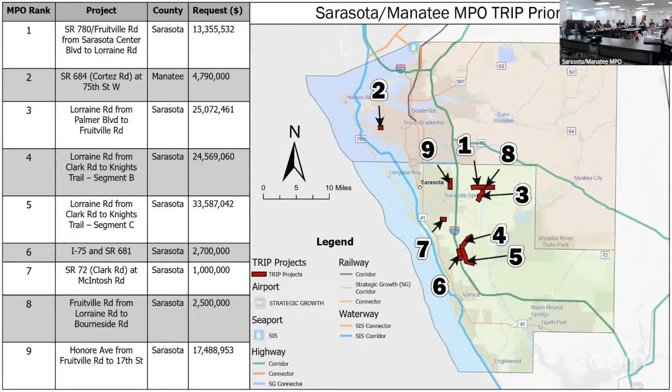All right. See any questions? So I will now entertain a motion to recommend MPO board approval of the 2026 joint TRIP project priority list. Is there a motion? So move. Second? Second. All right. I didn't catch who said it first. I don't know. Okay, my motion. Okay. All right, so we have a motion with a second. All in favor, say aye. Aye. Aye. Any opposed? Hearing none, motion passes unanimously. Thank you.

And Nina is still up. All right, the last action item today is 5D, advancing organizational safety culture. Thank you. So December last year, we kicked off a new safety initiative called Advancing Organizational Safety Culture. You may have heard us talk about it at the previous meetings, and so what we want to do at this meeting is offer a more detailed view about what this initiative is all about. We are taking it to the MPO board for approval on Monday.

Advancing Organizational Safety Culture is really rooted in the Destination Zero Safety Action Plan. Since the safety action plan was adopted, we worked on the education implementation plan, developed a high injury network. We had a pilot with Federal Highway Administration on their organizational safety culture self-assessment pilot, which helped develop this tool that FHWA was publishing and has since been published. And this is really where the MPO invited stakeholders like you to participate in that workshop. I think several of you were actually there. And it was really the first time that we were sensitized to this idea of organizational safety culture.

So we didn't do much changing of the objectives or the strategies or the action items because we kind of confirmed. We started with a clean slate every meeting. And when we got after it, we looked at it, well, thank God, that's like a 95% match of what we already had. So again, strengthening partner engagement, working with groups like this to help implement that culture and everything that's in their plan, it's perfect for this. And we did this with in mind that this isn't just a District 1 document. Every organization and partner in the district can use this as a guide to help you with your own approach. And so this MPO is actually steps ahead of most of the others in the district.

And then finally, reinforcing safety successes. This is the one area where it is kind of leaning in on projects, where if we've done some safety treatments on a roadway and we see that it's working, then can we do that in other locations? You know, repeat that success in other places. And I give you two examples up here.

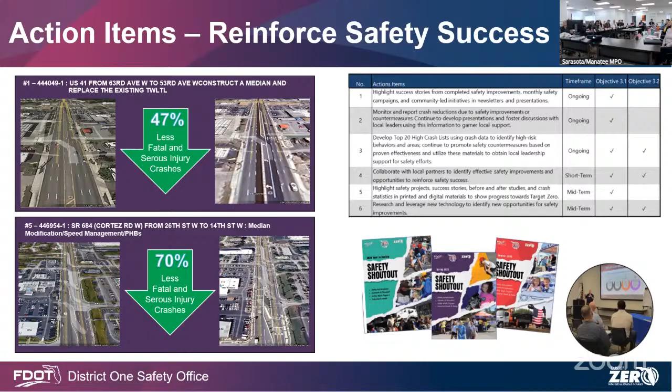On the left, this was a 41 corridor here in Bradenton area, and Cortez Road also in Bradenton area. Some of the modifications and treatments that we did out there have brought 47 and 70% less fatal and serious injury crashes in those corridors. And these are among our top 10 worst fatal and serious injury corridors in the district. So if we can do this here, we can do it elsewhere. And so that's what we mean by repeating and reinforcing safety successes.

This is a look at all of the emphasis areas that you see in the state's strategic plan and how we compare in district. Red are fatalities, blue are serious injuries across the district in each of these emphasis areas. So obviously lane departures is by far the highest, followed very closely by intersections. And then down about a third of the way down, you got aging road users. Anybody have any idea why aging road users numbers would be so high?

Retirement community. Retirement community is one, but what else? I asked the people that are in my age bracket in the room. We get injured a lot easier. Now you can hurt yourself going out the door in the morning, okay, sometimes. So we saw, especially in some of our counties where there are a lot of retirement communities, why in the world are your numbers so high? And it's not that they're serious injury crashes all the time, but just injury crashes in general. So aging road users, your bodies are not as strong as a 20-year-old. So obviously you're going to have a little bit more. So that's something to keep in mind.

Motorcycles and motor scooters. There's a lot of talk about e-bikes. I've seen kids. I saw a kid on Friday. I was driving home on 44th.

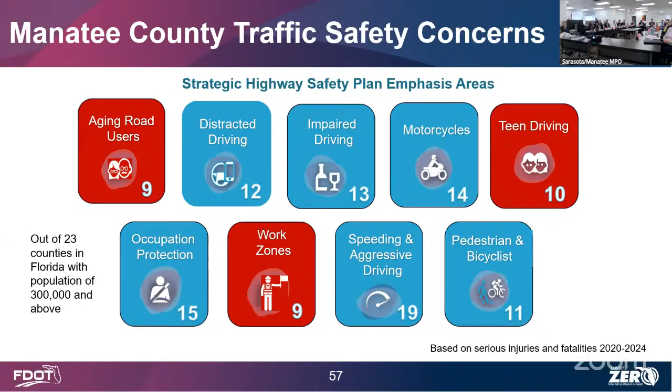So let's bring it a little bit closer to home. This is Manatee County, same emphasis areas. Look at the numbers here. Out of 23 counties in Florida with a population of 300,000 and above, that's what we're looking at. And then we have Sarasota County.

So what are we doing? We're going to keep updating this. The state is on there. The one that's coming out is their 2nd edition of their strategic highway safety plan. So we'll do the same thing. We'll watch ours and we'll see how we do on these things. And in 5 years, we'll do another update so that wheel will continually go around. And we'll see if these objectives need to change or be updated in that time frame.

So with that, I'll take any of your questions. And I will leave these up here for you to take. Don't worry about leaving some for the next committee meeting this evening, because I got more.

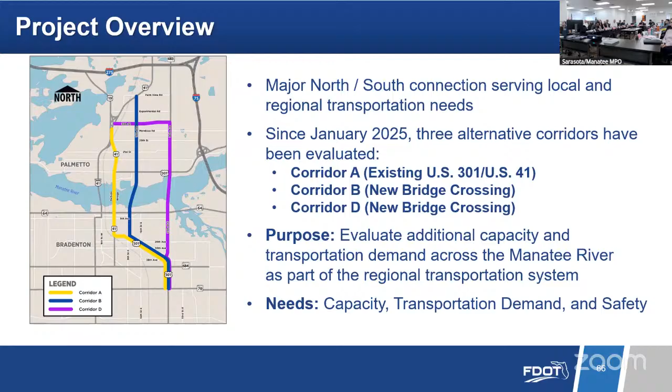The purpose of the study is to evaluate additional capacity and transportation demand across the Manatee River system, and also for the regional transportation needs in general. The needs of the project include capacity, transportation demand, and of course, safety. So the corridor analysis, as part of that, we looked at the traffic, we looked at the environmental and social impacts, we looked at safety, we looked at the project costs. In addition, we had continuous ongoing public coordination with the corridors, including the workshop that we had in February of this year.

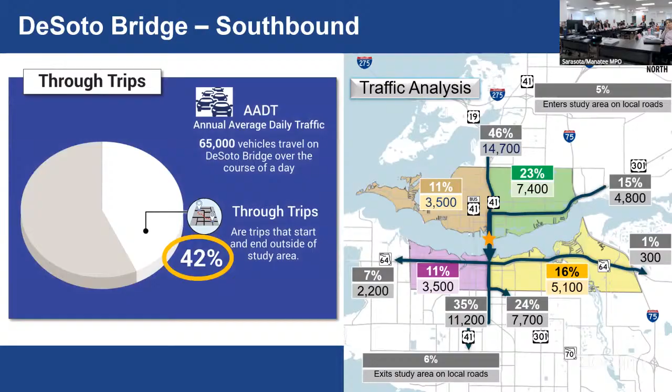So there's a lot of through traffic that's cutting straight through 41, not necessarily turning. So that's a pretty heavy, significant number. And that comes into play when we look at the alternatives. And then the southbound, you'll see it's pretty much the same thing. 42% are through trips throughout the area. So heavy movement straight through the area.

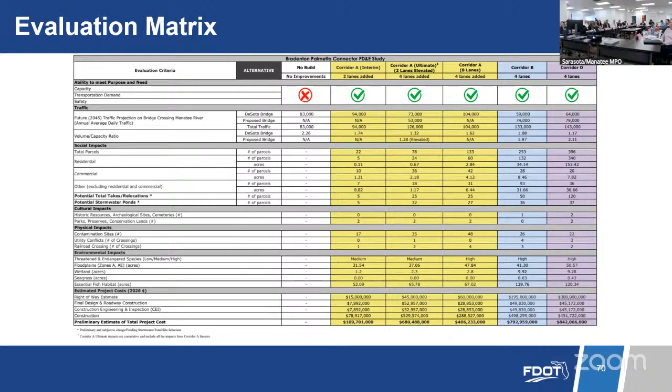You also have corridor A, which is the interim, and I'll get into that in the typical section slides. There was also corridor A, the ultimate, which is 2 lanes elevated with additional lanes at grade. So it'd be 6 lanes at grade and then 2 lanes elevated, and that's in the third column here. And then corridor A, we looked at an 8-lane option, which is 8 lanes at grade. And then we also looked at corridors B and D. Those are the 2 colors that were shown on that map.

So as a result of both the analysis and also the public engagement that we had regarding those corridors, this is kind of what we came up with. So we eliminated corridors B and D. Those were eliminated a lot due to property impacts, environmental impacts, and also social cultural impacts too. And of course, anytime you're making a new corridor, you're just bound to have more impacts because there's not a road there, there's things there.

And then the other one that we eliminated, maybe we didn't put it on the slide. Okay, so I also mentioned in the one before that there was an 8-lane at grade option that was also eliminated within this process too. And that was the 8-lane at grade option that would follow the yellow corridor here. So that one was also taken out. So now we're left with the 6 lanes at grade with 2 lanes elevated. There's also the interim that I mentioned that I'll show in the upcoming slides.

So we're going to continue to analyze the refined project limits. And by that, you see all of them started here at State Road 70. We've since refined those project limits to cut it all the way back to 9th Street East right here on 301. So that was what we mean with the refined project limits. And also we're analyzing 6 lanes at grade with 2 lanes elevated. No build is still a viable option also. And we're aiming to have a public hearing this summer, 2026.

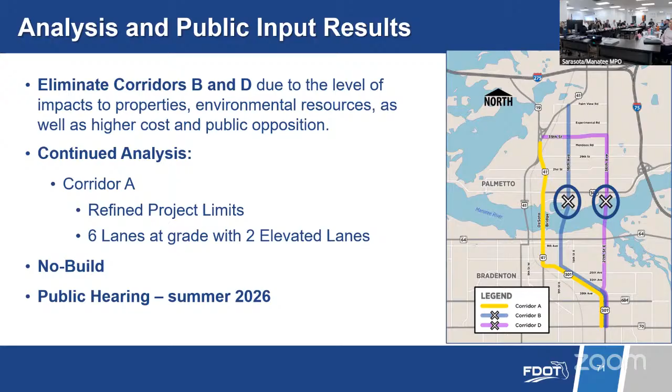Okay, so now we're going to take a look at some of the typical sections along the corridor. We're starting with the no build. The no build doesn't mean that we'll do absolutely nothing to increase the quality of the corridor. There could still be some what we call operational improvement projects, some signalization upgrades, safety upgrades that can still happen throughout the life of the corridor. But for the most part, this is what the existing condition is and what would appear in the no build.

So first, we're going to start south of the DeSoto Bridge. Speed limit for this section is around 45 miles an hour. The typical section varies a lot in this area. For a good chunk, it's actually 7 lanes going northbound. So we just wanted to represent this as a general observation of what happens in that corridor. So for the most part, it's 6 lanes with 3 northbound, 3 southbound. There's sidewalks on both sides of the road and no car parking.

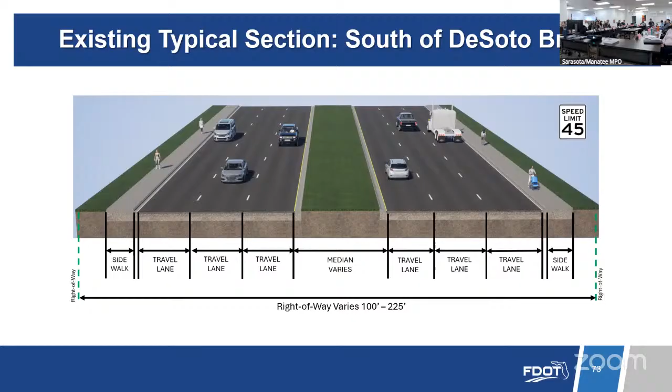When we look at the DeSoto Bridge typical section, you have 4 lanes, 2 lanes northbound, 2 lanes southbound. There are no bike or pedestrian accommodations along this structure, and the speed limit is 50 miles an hour.

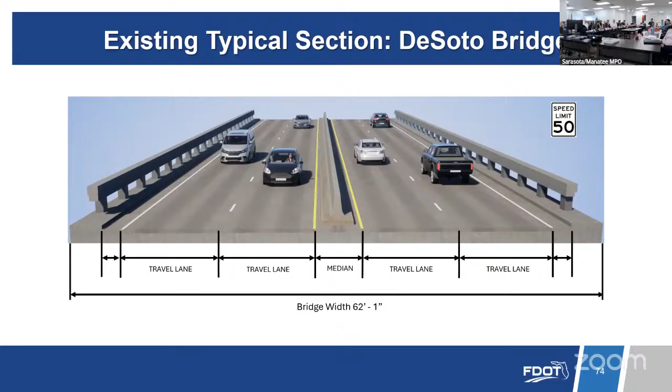Now we're looking north of the DeSoto Bridge. There are 2 lanes in each direction. There are sidewalks, but they're not consistent throughout the corridor. That's why we didn't show them. There's also no bike facilities, with a speed limit of 50 miles an hour.

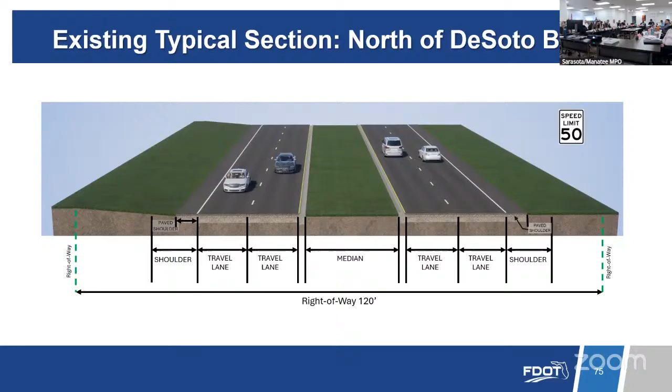Now we're going to look at the build alternative. And what this one refers to is corridor A, which is 6 lanes at grade and 2 lanes elevated. Now, I did mention that the project limits were being revised. So here you see that happening, with the project beginning at US 301 and 9th Street East.

Then it continues west along US 301, merges with US 41 and continues north across the DeSoto Bridge, ending just north of 25th Street East. There's a bridge here with a railroad line crossing, but for the purpose of the project, we can say it as north of 25th Street East.

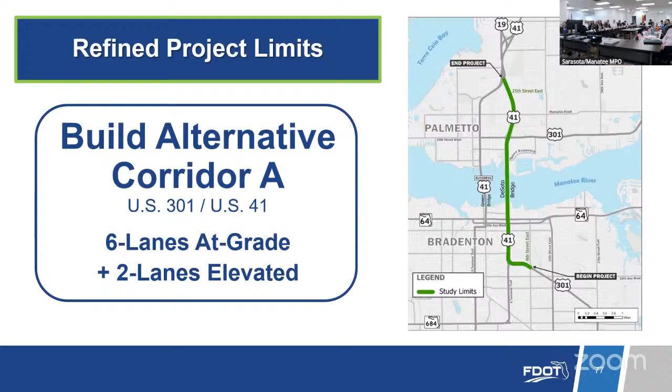Now for the DeSoto Bridge, we're also maintaining 3 lanes in each direction. One thing I want to note here is that you have that elevated viaduct in the previous image. So at the bridge, to save us from building 2 structures for no real reason, we're just going to bring that viaduct down at grade and cross it on the same structure. So you have these 2 lanes in the middle, which will be those express lanes, separated with a buffer separation.

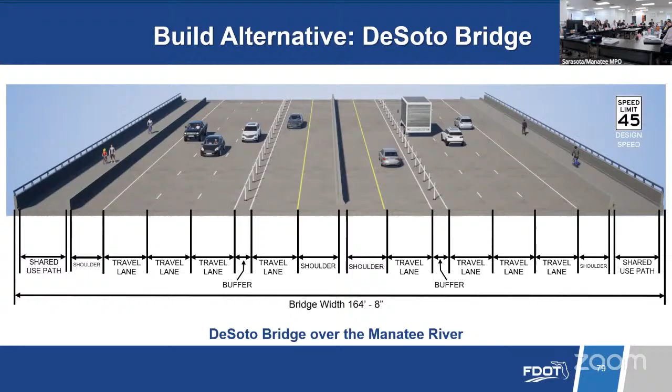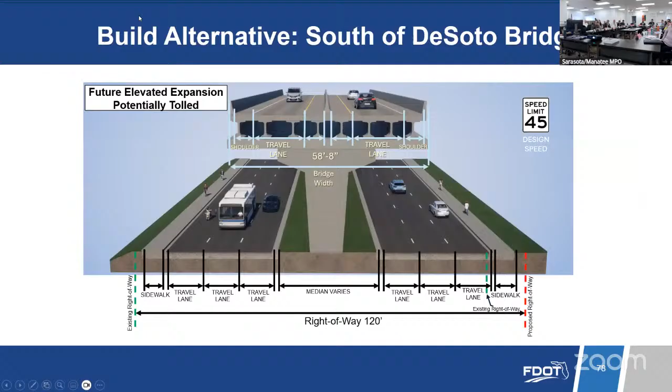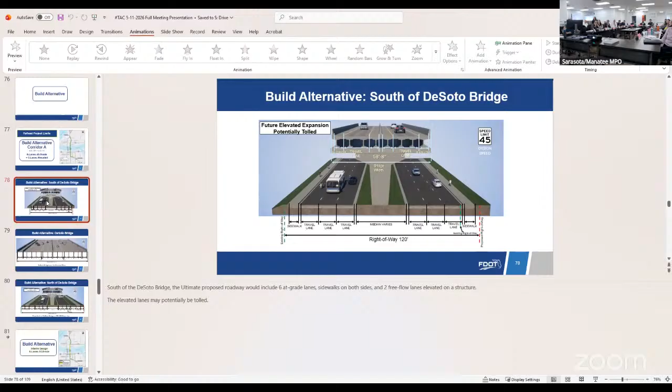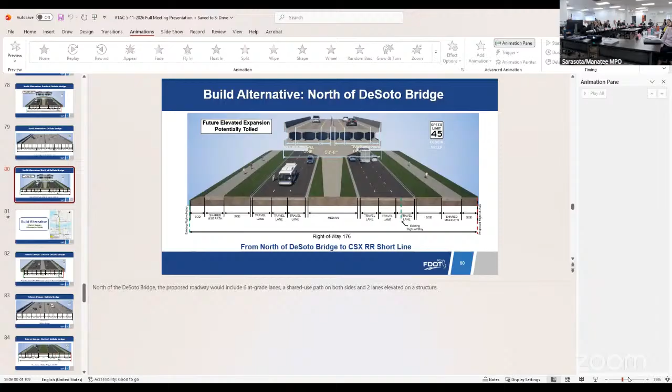Okay. No, hold on, if you wait a second, I can turn it off. Wait, does it even? How do you do this again? Animations, sorry. There's not a star there, so it doesn't look like there's anything on it. I don't know what's happening. And the problem slide is the north. Oh, because we're not even on the right one. Try that one. You could probably just make that slide bigger here, and we can look at it in this view. That works. Wait, what side is this? That's weird, pull down the notes section, right?

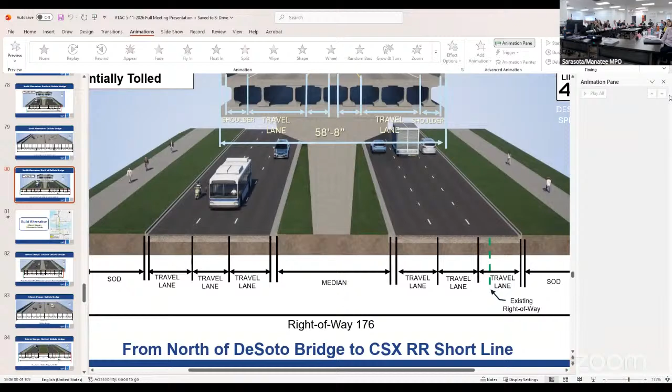We'll have this fixed, that's nice. Here, that's. Yes, perfect, yes.

So, okay, so the typical section, mostly the same. 3 lanes northbound, 3 lanes southbound, so this one would be widening north of DeSoto Bridge. Right now it's existing kind of 4 lanes along that corridor. What do you mean by north of DeSoto Bridge to Palmetto? Yes, ma'am, Palmetto. Yes, that's correct, Palmetto.

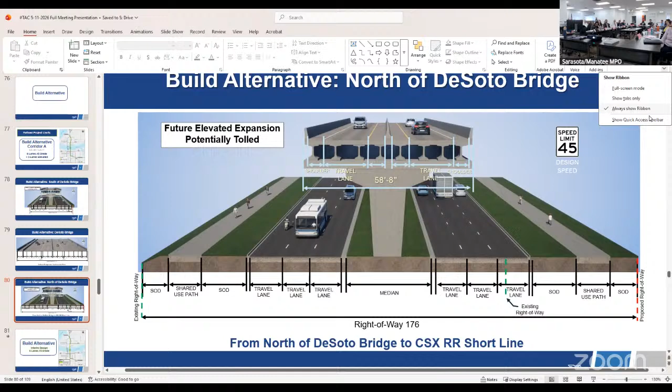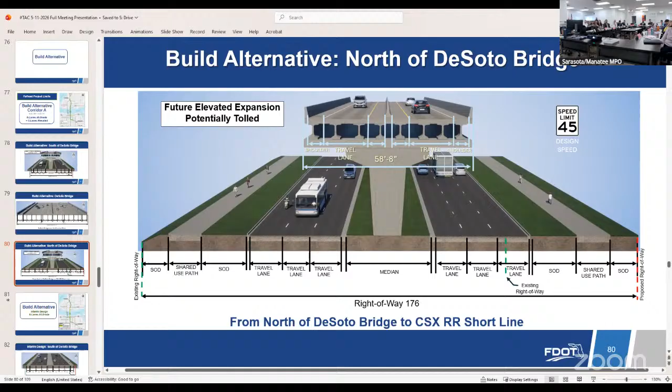And then we do have shared use paths on both the west side and also the east side, with a speed limit of 45 miles an hour. And then, of course, just like the typical section south of the DeSoto Bridge, there's potential for it to be tolled. Next slide, please.

Okay, so now we're looking at the build alternative, the interim. This is one I mentioned a little bit before. So just reviewing the limits, we just went through the one in green, which is the build alternative. And then we have the interim design here in yellow. So you see those limits do intersect each other. The interim one begins at 64, Manatee Avenue East, which is westbound 64, goes across the DeSoto Bridge and ends just before the US 301 or 10th Street West intersection.

You may be familiar with the DeSoto Bridge PD&E that was concluded last year. That one was studying what we call an in-kind replacement, replacing the DeSoto Bridge just as a 4-lane bridge structure and adding shared use paths on each side. But since then, there's been a lot of changes internally with FDOT. So they're able to utilize those federal funds to fund the in-kind replacement, but also add some additional state funds so they can potentially do a widening.

So we're looking at this opportunity. Of course, we don't want to hit a bridge twice. We want to have as minimal construction impacts as possible. So what we prefer to do would be to build it to a 6-lane structure that can be expanded in the future to accommodate the future express lanes.

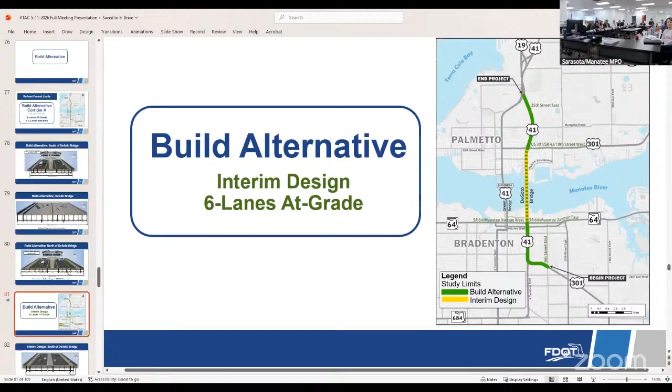So just rebuild the bridge once, you can do it for 6 lanes, but in order to do that, we have to do a new PD&E study, because when you study an in-kind replacement, it doesn't look at capacity additions. And you can't take that study that just looked at a 4-lane one and say, okay, we're just gonna add 2 more lanes, like pencil it in. So that's why it's a little complicated and why we're having 2 PD&Es. So our study is looking at, again, the yellow for the interim. Next slide, please.

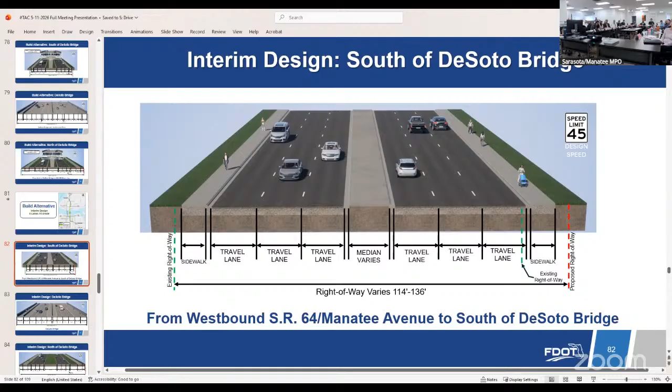So now we're looking at the typical sections for it. South of the DeSoto Bridge, again, this starts at State Road 64, so it starts a lot further north than the other one. It will maintain the 6 lanes, 3 lanes northbound and 3 lanes southbound, and we'll also maintain the sidewalks on both sides of the roadway. Next slide, please. And then for the DeSoto Bridge, 3 lanes northbound, 3 lanes southbound.

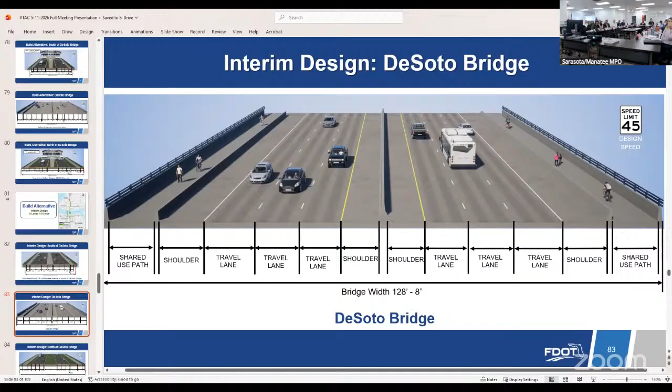You'll notice that you don't have those 2 express lanes in there. But the bridge will be constructed so that it can be widened in the future. So instead of adding a new structure, you just widen to the outside. You don't have to drill any piers into the riverbed. Just add to the outside, and then you can put additional lanes on there. And it will include much needed shared use paths on both the west and east side of the bridge structure, with a similar design speed of 45 miles an hour.

Oh, and also add shoulders too, because I'm pretty sure everybody's familiar with, if there's a crash, the bridge just locks up. So now there'll be shoulders so, in case of an emergency vehicle or an incident or breakdown, they can pull to the side and keep traffic going.

So north of the DeSoto Bridge, we're looking to have 3 lanes in each direction. Again, this is the shorter limit, so this one just ends at US 301, so it's not going as far north as north of 25th Street like the build alternative. So there'll be a little bit of widening to 3 lanes northbound, 3 lanes southbound, and you'll have the shared use path on both sides of the road also.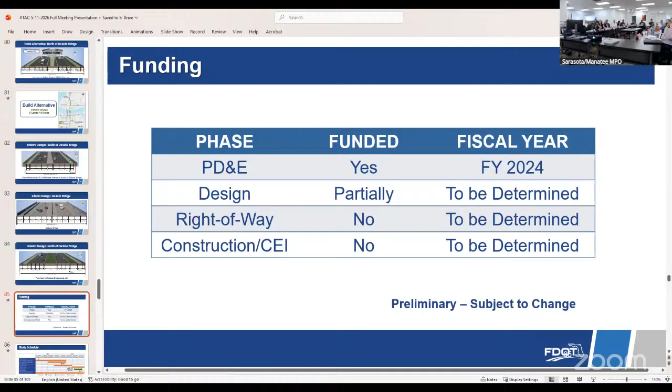Next slide, please. So right now we're finalizing the environmental and engineering documents. We're continuing to refine the concepts. One thing that we're gonna add that we didn't have at the workshop are the pond locations, because of course we have to treat the water that comes off, but you don't really look at that in alternatives analysis. So that's one thing that we're looking at now, and we'll have it presented at the public hearing.

We're also going to work with the state environmental agencies. Now we have to dive deeper into the cultural impacts, the environmental impacts, just make sure that we're dotting the i's, crossing all the T's in regards to all the community impacts that we're going to have with the project. And also planning for the public hearing in the summer. And we're going to select a preferred alternative, which will be presented at the public hearing this summer also.

Next slide, please. So this wraps up our presentation. Go to the project website that is live now. When we announce a public hearing, around 21 days before, we'll have all the documents in libraries of both Palmetto and Bradenton, along with the District 1 Manatee Op Center. But more information will come as that schedule gets finalized.

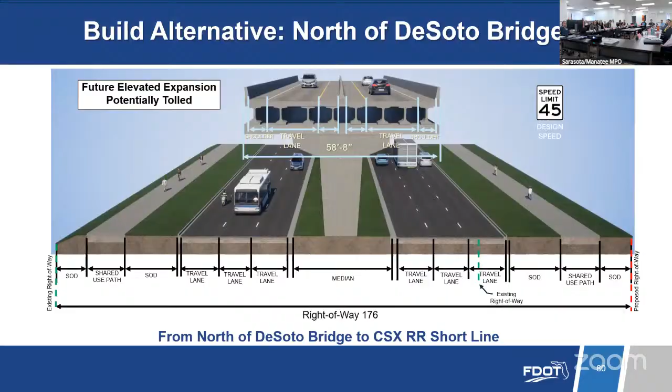Yes. So in terms of how this is gonna affect downtown Bradenton, where does the elevation start? Great question. So we don't have the concept right... Oh, wait, I can say a little bit. All right, so you're talking about Bradenton, so basically, as soon as you get off the bridge, you start elevating it because you need to get elevated over State Road 64.

So it's not gonna go up through the actual downtown? I'm sorry, it will? Where does it stop? Yeah, so it'll start to get elevated here. Land on your side of the bridge is where the elevation is. But this bridge isn't gonna elevate to downtown. It's not gonna get the traffic up from downtown where it is right now. It's gonna go from 9th Street, right?

This road separates two different parts of a very urban neighborhood, and it's very difficult to cross it. I mean, you can cross it, but it's not fun. And so I was thinking, if you started the elevation earlier, you could get all that traffic off the ground and make it more city-like underneath. Well, let me just start from Palmetto and I'll go down.

Okay. So starting at Palmetto, the elevation would start basically as soon as you get off this bridge structure here, which crosses over the CSX line right here. So it starts to be elevated here and will continue to be elevated. Okay, so Palmetto's getting the city treatment, what I'm talking about, getting elevation, getting it off the ground, and then it's on both sides.

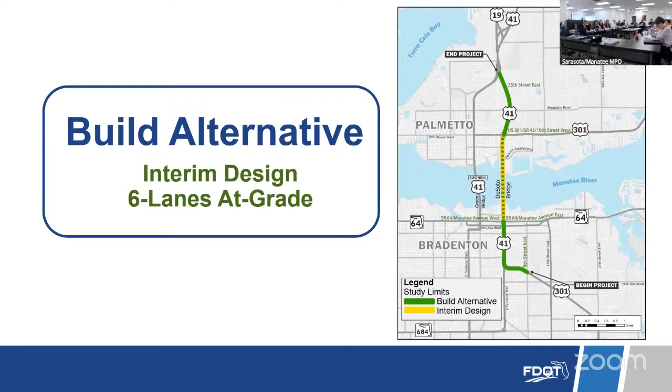Thank you. All right, moving on to item 6B, the MPO report, which includes 6B1, MPO study progress. MPO planning staff. Nina. That's me, at least for the first part.

So we just want to make a habit of offering updates on the planning studies and initiatives that we have going on. As you all know, we are updating our prioritization process. We did have the opportunity to interview most everyone in this room, I believe, about our prioritization process currently, what's working well, what's not working well, and where there is room for improvement.

So our next step is we're currently summarizing everything that we heard in those interviews. And then at the next stakeholder workshop on May 27th, we'll bring back what we heard. We'll offer some recommendations for improvements we can make to the prioritization process, and discuss those with you before we go and implement any changes to the process or the tool itself.

So you should all have received an invitation to the stakeholder workshop. It's May 27th, currently right here at this location. And then the goal is to have this wrapped up ahead of the next call for projects, which will happen in the fall. And then our consulting staff will be staying on for some technical support.

So that's where we are. I hope to see you here on May 27th for that workshop. And then I'll hand it over to Nick.

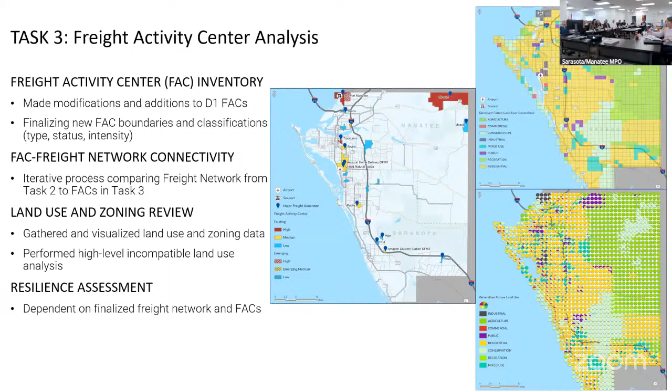And then, of course, we're going to look at resiliency assessments as well, overlaying some of our previous and current work with exposure to weather events and such.

And we have some nice photos from our Port Manatee tour where consultants went out, and some stakeholder events such as the truckers appreciation event in September. So really getting down and seeing the people who actually move freight in the region and getting some thoughts, and we're currently finalizing our stakeholder list, and that'll be ongoing for quite some time. And with that, we'll have Banesh here to give you an update in September. Any questions from anyone about the regional freight analysis?

All right, I'm gonna give you some updates on our last two studies that we're working on. The first one being the watershed and transportation asset analysis. So as you may recall, this study is building upon the MPO's resiliency and vulnerability work that was done in 2023 and 2024 to help us better understand and identify transportation infrastructure vulnerabilities caused by storm surge, flooding, watershed hazards.

Currently, the study team is wrapping up task 2, which is the data collection, integration, and regional flood modeling. This task establishes a framework for conducting the vulnerability assessment and evacuation scenario planning. So they're establishing this framework that has data in 5 different categories of transportation assets, community assets, associated economic indicators, natural hazards, and then base map data.

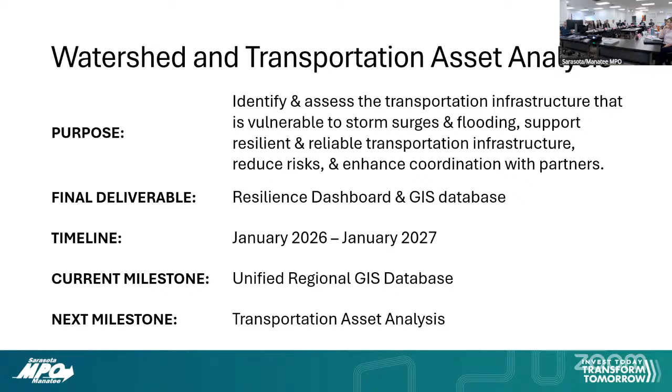So using this framework, the study team collected data sources from both federal and state sources, as well as conversations with local state stakeholder partners from our jurisdictions. They are taking that data and identifying any remaining gaps that need to be looked at and addressed. And once that's completed, they'll move on to task 3, which is the transportation asset analysis portion.

So they have done interviews with representatives from 9 different organizations within our jurisdictions to make sure that we're using the best data available out there and ensure that we're all headed in the same direction with our efforts and not competing against each other. We also opened a survey in April to see if there's any local areas that are experiencing flooding that aren't captured by some of the data models that are out there now.

That survey, if you did get an invite and you haven't filled it out, there's still some time to provide feedback. And if you didn't get an invite, don't worry about it. You don't need to provide any of that feedback. And then later this summer, we'll be hosting a workshop with those stakeholders to affirm that what they've identified in the analysis is correct, or are there additional gaps or areas that we should be investigating.

And then the last study we wanted to share an update on was the regional transit feasibility study. As you might remember, this is to look at the unmet transit needs within the region and evaluate options to address those needs, hopefully leading to an identification of practical actions and strategies that we can do, which will include potential funding sources to implement some of those potential opportunities.